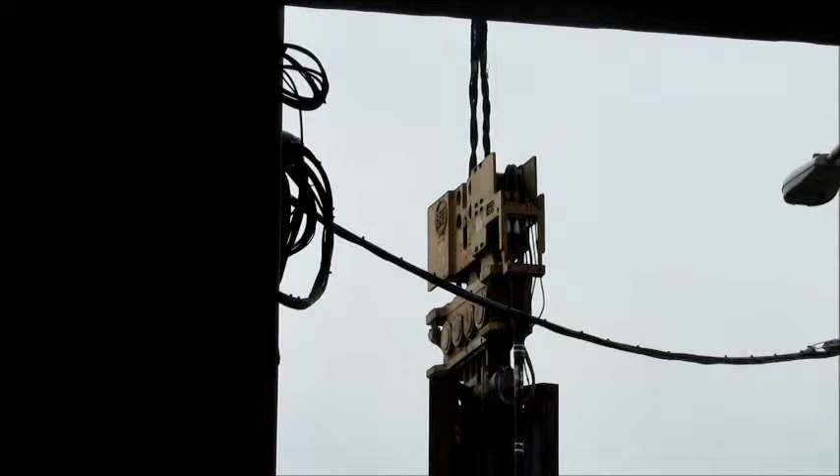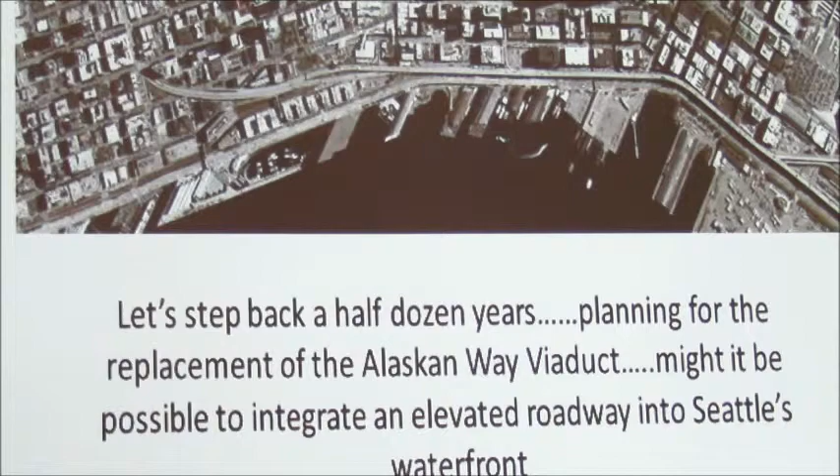Back maybe a half dozen years ago, the Seattle area was debating what was going to happen with the Alaskan Way Viaduct. They had a line on some money, a commitment to how it's funded. It needed to be dealt with. What was going to happen? It's a state road, so Washington State Department of Transportation took the lead on the project.

When Seattle embarked on this journey of trying to discover what to do with the Alaskan Way Viaduct, they hired a bunch of consultants. The consultants were hired by WashDOT, so they did what WashDOT wanted them to do. These were architects and engineers, the team assembled to do the job. And they did immediately what you would expect engineers to do: they focused on things like tunnels and big viaducts.

In the midst of doing that, there was this notion called an integrated elevated alternative. The thought was that somehow you could take an elevated structure and fit it into the urban landscape so it kind of became part of the community, part of the city. Well, they didn't know how to deal with that. So the project continued year after year after year with this idea, and they couldn't define it. Might it be possible to integrate an elevated roadway into Seattle's waterfront?

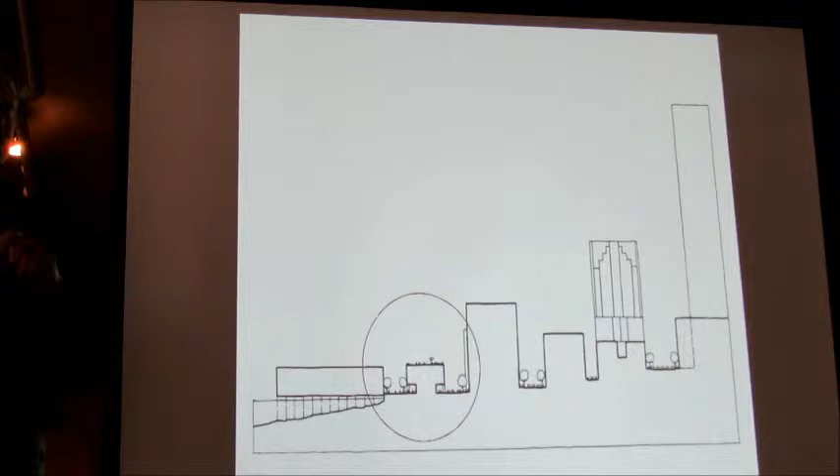That was the mission: is this going to fit in Seattle? Is this thing with a lid on top, a roadway inside, a bunch of people, and local street activity going to work on the ground level?

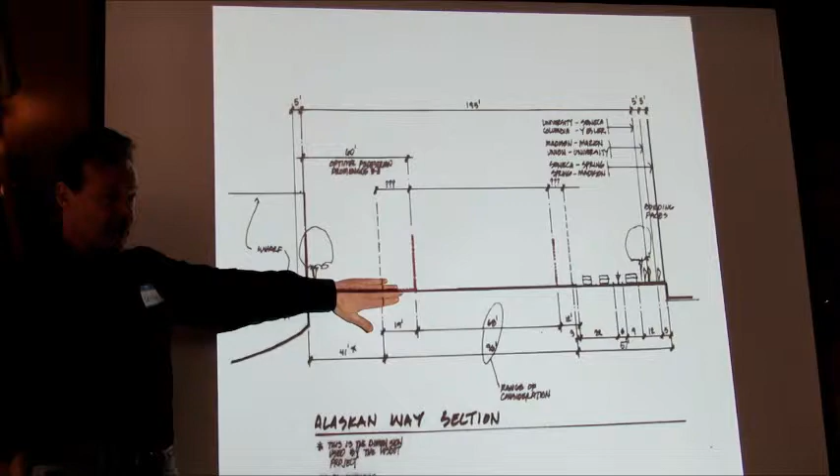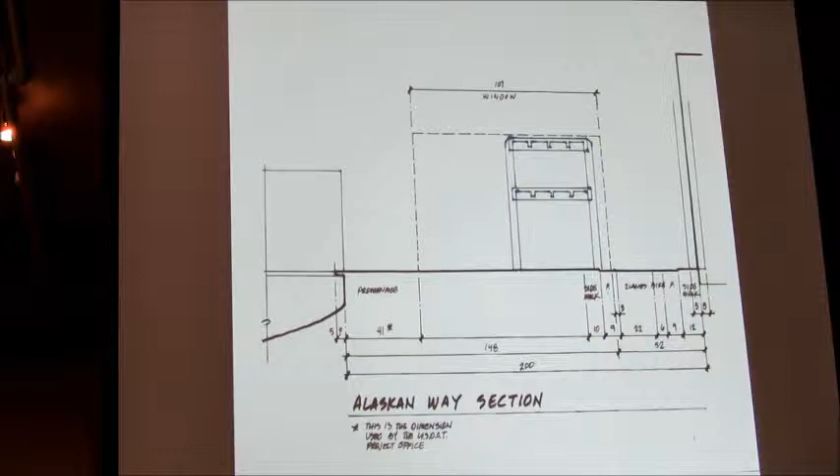This is what we had to work with. We had a zone near the water's edge that needed to be pedestrian. It needed to be a grand place for people to promenade. We had the need to serve these buildings that were opposite the Alaskan Way Viaduct. What we ended up with is a space, an envelope, that it might make sense to replace the viaduct with something that integrated into the urban environment.

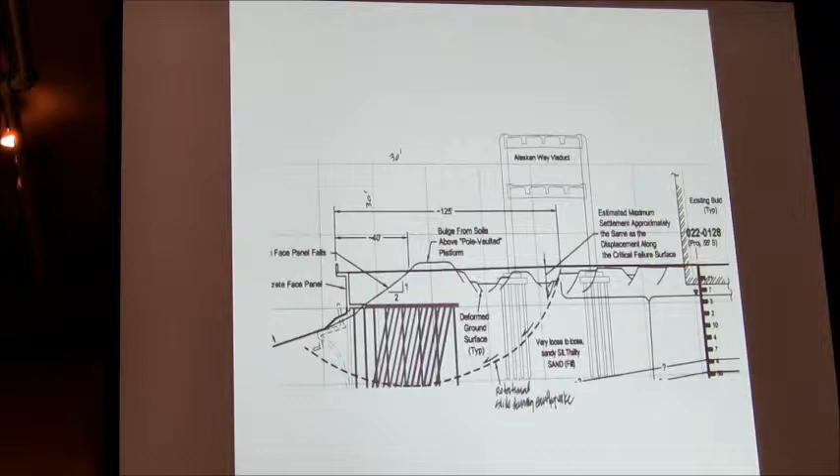We're waiting for the Seattle waterfront to slough away. Part of the constraint was dealing with this old embankment and the need to replace that seawall. Anyway, it was somewhat of a complicated exercise from a land terra firma point of view.

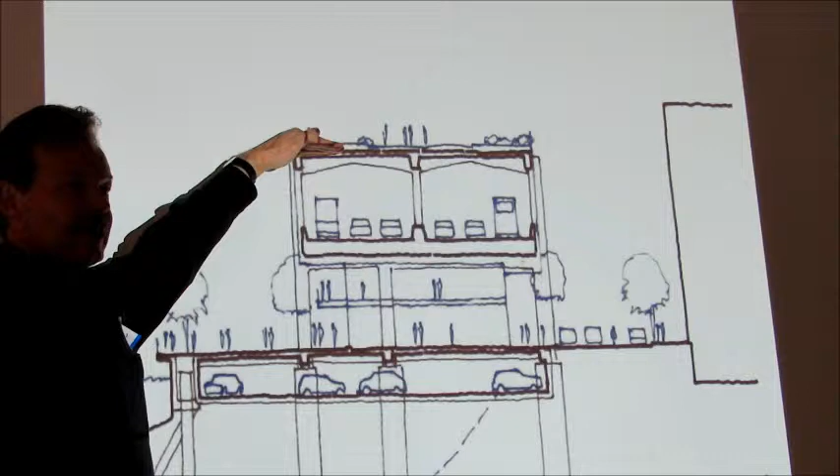So we quickly said, okay, what do we have to work with? We have the need for two lanes. This is an odd collection of sketches, so they're random and don't follow the process we went through: one level roadway, a lid on top where people could enjoy the views. That lid, incidentally, when you brought it from the market down to the stadium district and include the pedestrian edge along the waterfront, would be more than one million square feet of public space.

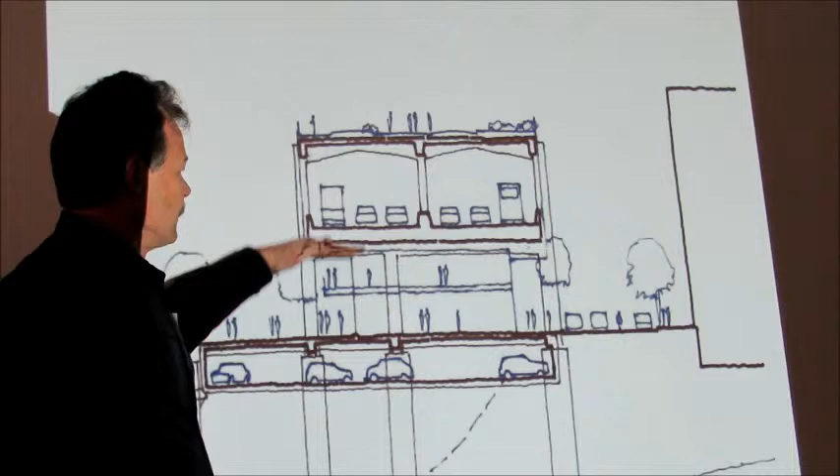Huge. A ground level that we wanted the roadway to be high enough so you could get two levels of activity in there, and then a pedestrian promenade. There was always the cry for more parking, so we were considering using what they have to excavate anyway to do the pile caps as a place for parking. We had to phase it.

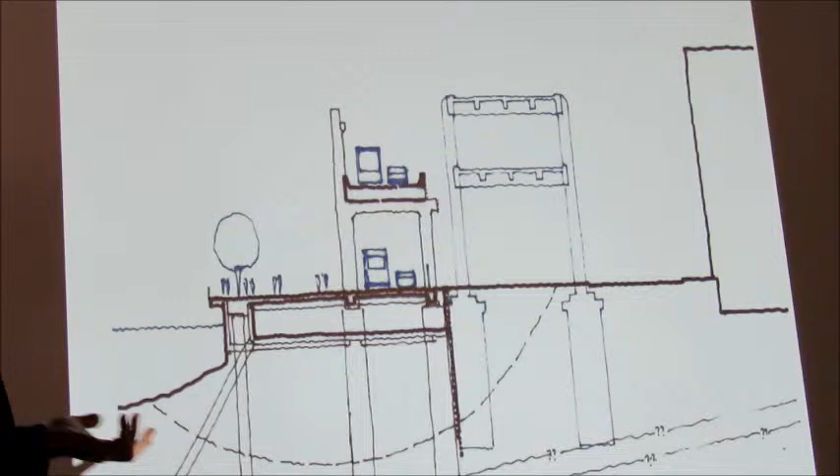Here's where the technology, the roadway, starts to get in the way with what you're trying to do from an urban design point of view. That had to be done before that could be taken out. You've got relationships there that are rather physical. Just to give you an idea of what we were dealing with, there were some real hard technical constraints to come up with something that worked well.

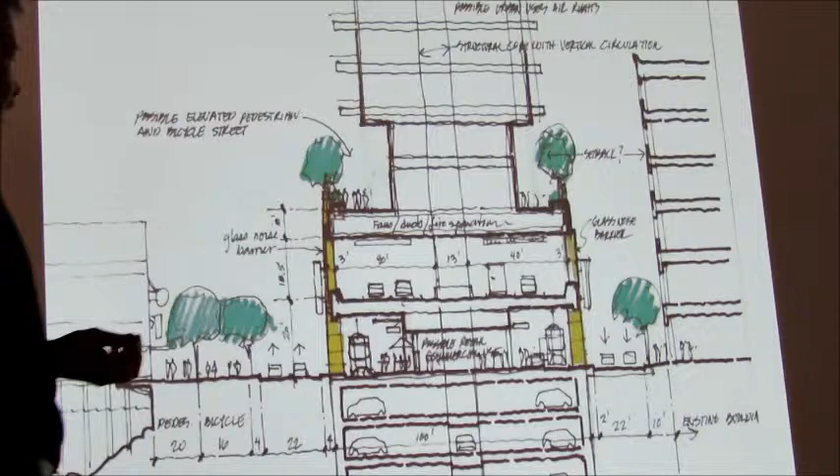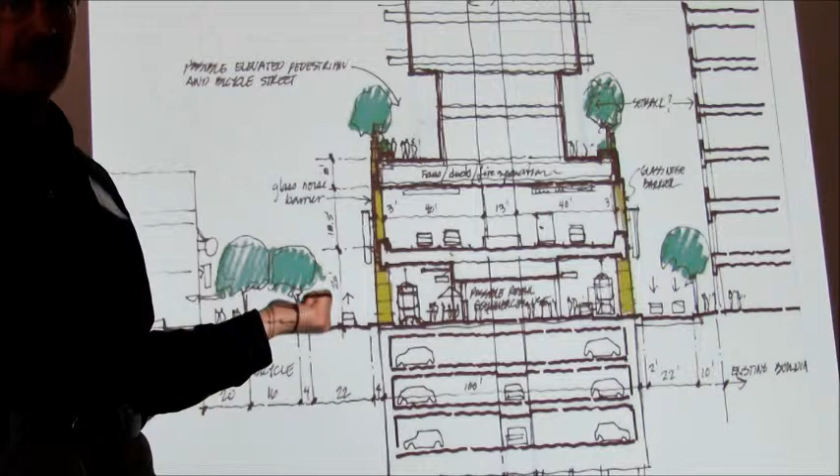We said, okay, let's think big, let's turn this into a mixed-use place and think grand. You do that as a teaser to the audience, so that you don't get somebody coming back later and say, well, why didn't you? What you quickly determine by doing these sort of sketches is what the community is willing to support. Oftentimes you do things that you don't want to do just to tease out that reaction. So anyway, sketch like this.

Eventually it ended up settling down to this cross-section: a shop, a couple levels, tight, the roadway.

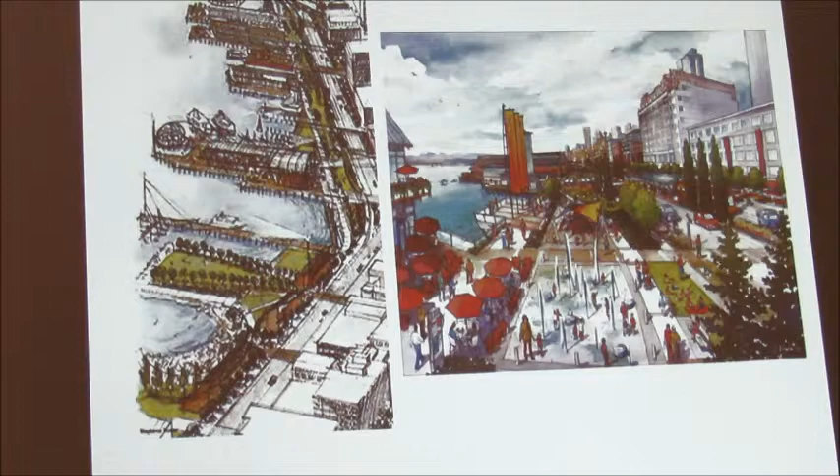And we knew there were decades of aspirations associated with turning the waterfront into a spectacular public space. So we had all this stuff that everybody expected that this integrated, elevated structure would fulfill.

Next, we had view corridors. What we came to realize, which is very important if you're going to play with this, is when you're down low, maybe the viaduct pokes above the wharfs. Remember, the wharfs are skewed, they're at an angle, so you really don't see the waterfront on these view corridors until whatever is there gets above these wharfs. As you get closer, the wharfs become the dominant thing, not the viaduct. And as you get up to 4th, it's meaningless—it does not have any impact whatsoever on the view corridor.

So where I was hearing noises from the community of architects and urban designers that you can't block the view corridors—right, nobody wants to do that—but it's still possible to do this without blocking the view corridors if it's carefully handled, is what I discussed next.

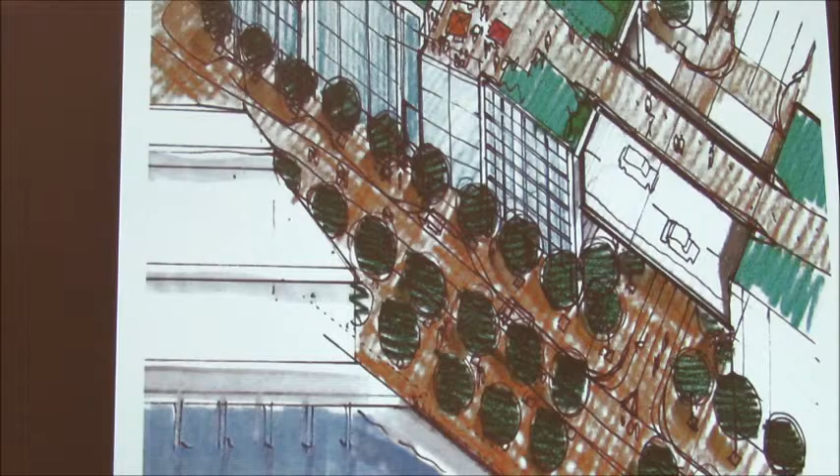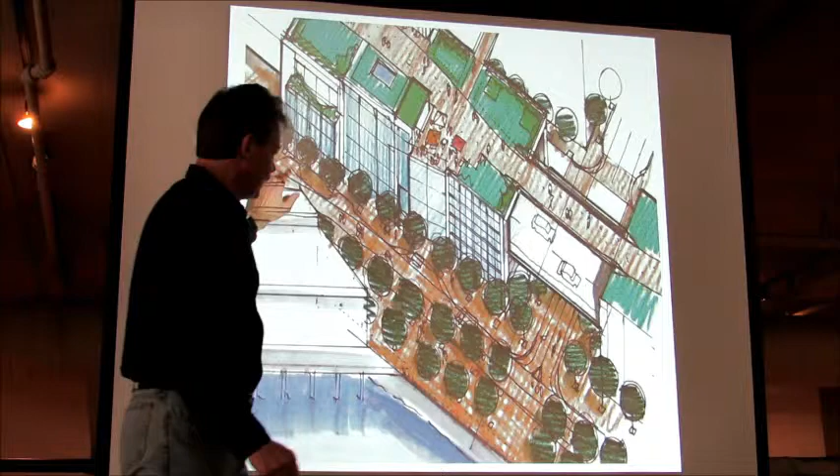So we ended up doing a series of quick sketches to model this. This is the block, the green roof, something light that spans the streets so that you don't take away that largely perceived notion of a view corridor, and a ground level that's activated like most waterfronts—a wide promenade roadway to serve the local community and shops.

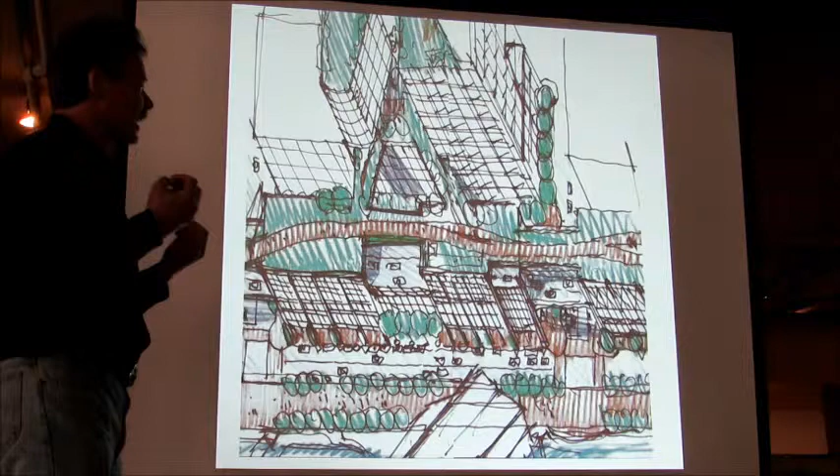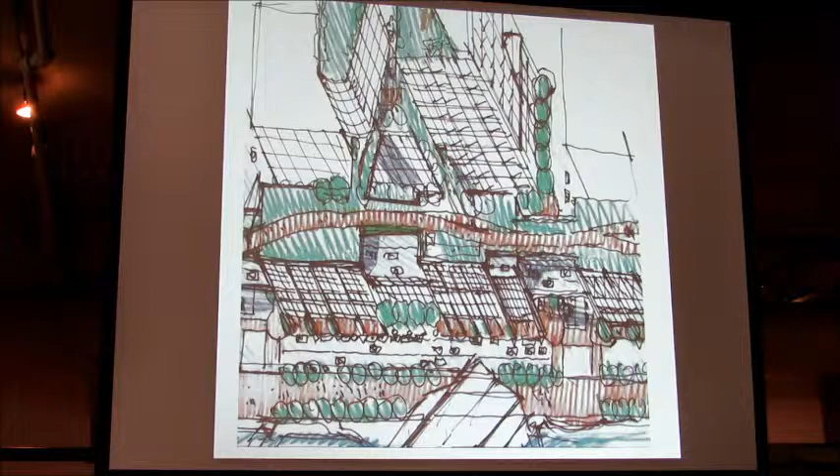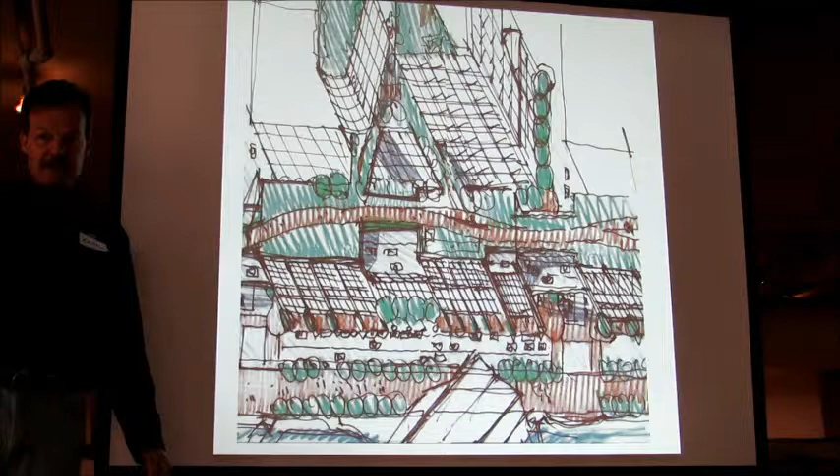Next, we said, okay, this green platform that is this park, it wants to meld back into the city, it wants to connect to the city. Much like if you've ever been to Lisbon, it's got the higher residential areas, and you take these little bridges out, you've got these beautiful elevator towers. What you do is connect the green platform back into the city. There's a lot of redevelopment potential between Alaskan Way and downtown where you could do this too, and that I thought was really exciting.

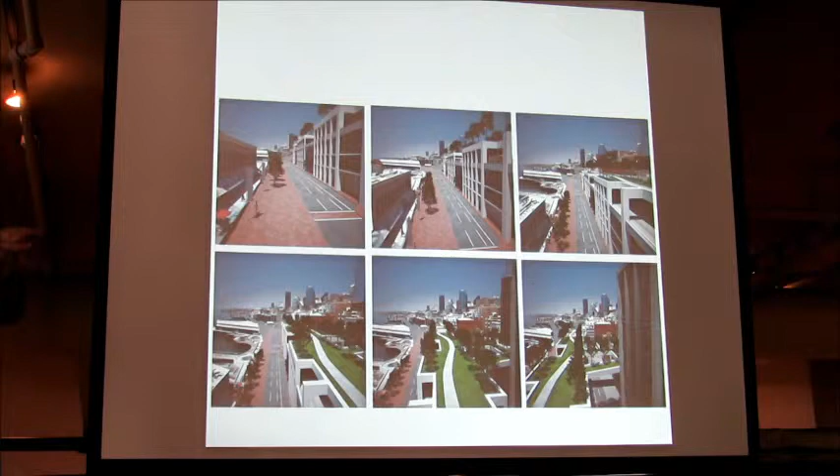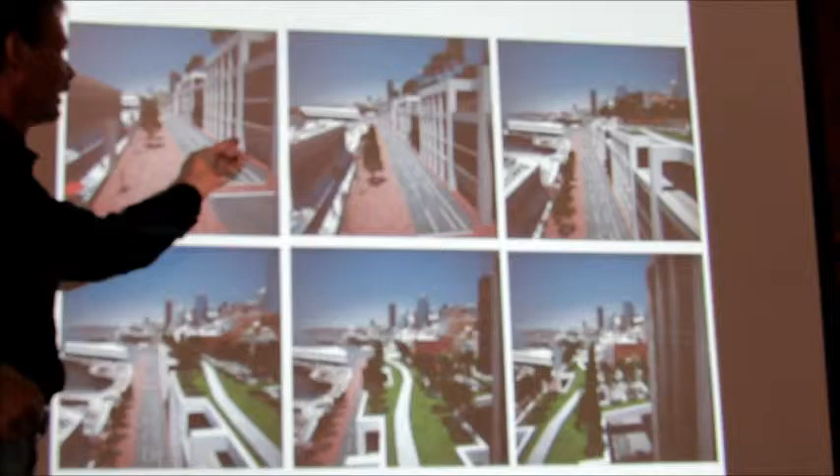Next, we said, okay, we got to get hard—we're working for a bunch of engineers and we've got to do simulations. This was back when simulations were kind of a new thing, so they were kind of crude, but the notion was a large landscape, street, the shops. This was taking on the Singaporean model of an arcade—you walk under the edge, inside, up over, you wrap the roadway with a glass skin. You use sound-absorbing pavements, and you have a continuous structure on the roadway, so you don't have that clink, clink, clink every time it passes an expansion joint. That roadway in that configuration would be quieter than a city street, so we were confident that the noise issue was not an issue.

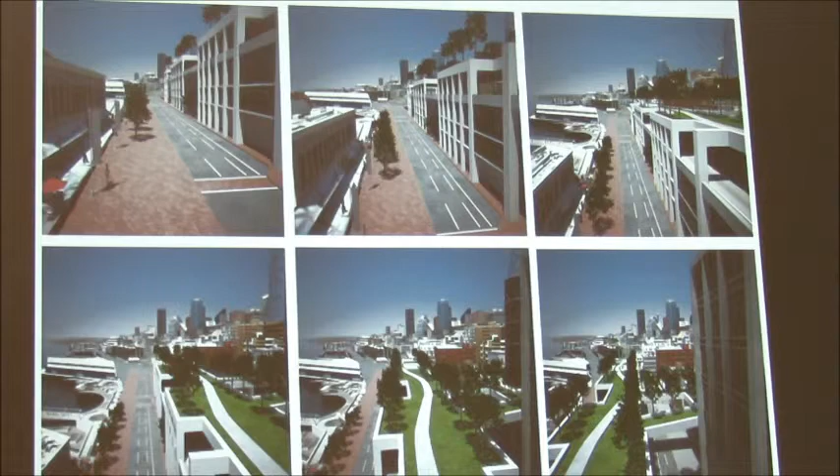And we climbed up over, we begin to see the relationship of this object to the waterfront, which then became this wonderful pedestrian experience, or green roof on top of the freeway next. But we knew we were fighting a problem uphill as we created a bit of a canyon between the existing structures and the eastern edge of the viaduct.

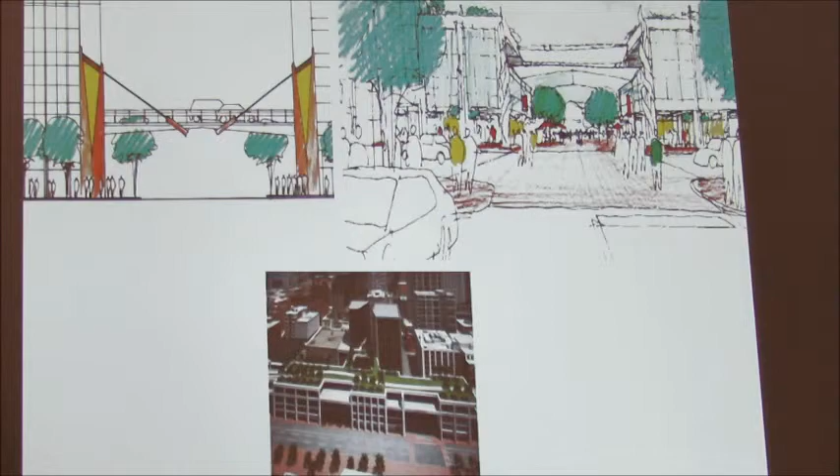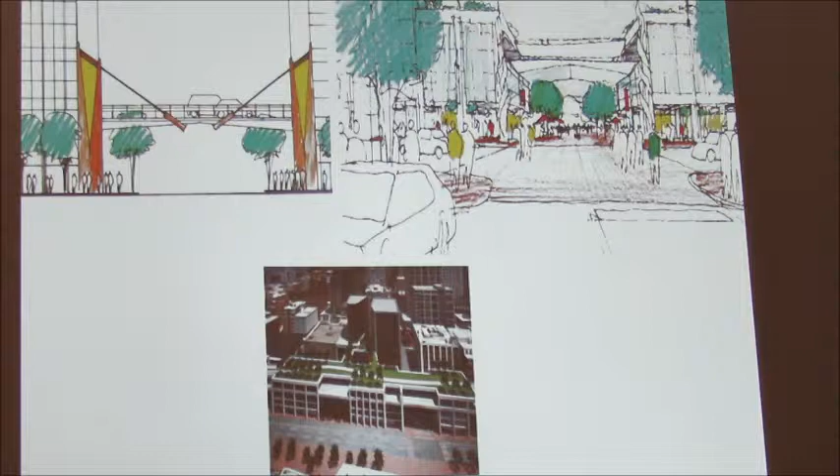Next, we always had the problem of dealing with the perception that we were blocking views. So we played around with different ways to try to make it as transparent as possible where the roadway cut through the east-west streets. That really was kind of a nice thing to do, because it forced us from this long linear thing to a series of city blocks, so that the architecture of each block could be much more responsive to the immediate context of the area, and not be this homogeneous structure that essentially would repeat the homogeneous linear structure that is the current structure out there. So we ended up liking that.

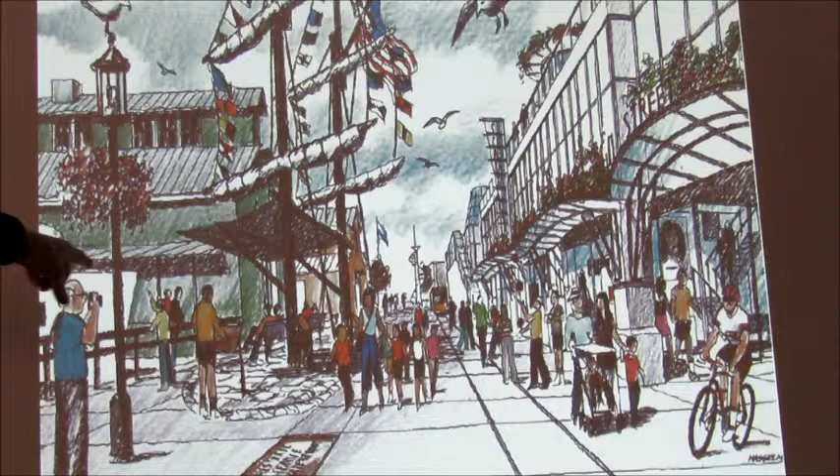Waterfronts are only successful if people feel that they are part of a civic, promenading, festive, fun place. What I desperately worry about the current design is it's too damn wide—it's anonymous.

So every successful waterfront that's truly devoted to the pedestrian—that distance is 40 to 60 feet, it's never really more than that. If it is, then people will take their picnic basket out and treat it more as a rural setting, not an urban setting. Walk around the world and look at different waterfronts—beautiful when they're pastoral and people can go out and have a picnic lunch, but successful urban waterfronts become successful from a pedestrian point of view when they're active, vibrant, festive, fun places to be.

So we were playing with a lot of different images from a lot of different places, like I said.